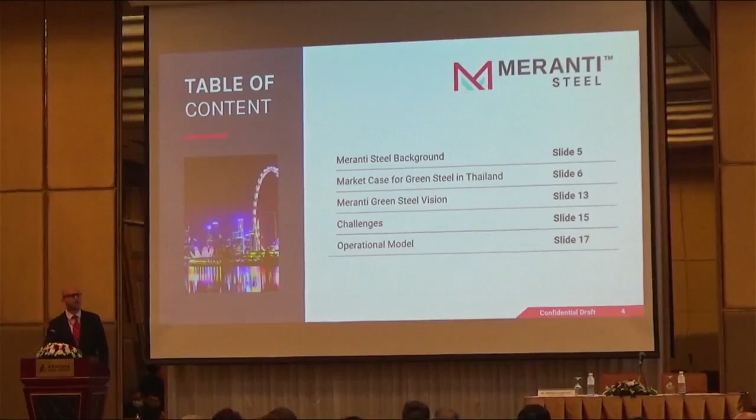A very brief background on Meranti Steel. The market case for steel in Thailand is green steel, and we've heard a lot of fantastic presentations on it, so I will keep that short. Then the Meranti green steel vision, challenges, and operation. The focus will be on the operational model, because at the end of the day, the question is how can we actually do something like green steel.

Very briefly on the background: this is our factory in Myanmar. Meranti Steel was incorporated in 2016, headquartered in Singapore. We have a joint venture with JFE Steel and Japanese trading companies for coated steel in Myanmar, in the Thilawa Economic Zone. It's fair to say it's one of the most modern manufacturing plants in Myanmar. Capacity in phase 1 is 180,000 tons, in phase 2, 360,000 tons. We started production on CPL in February 2020. This was our first project.

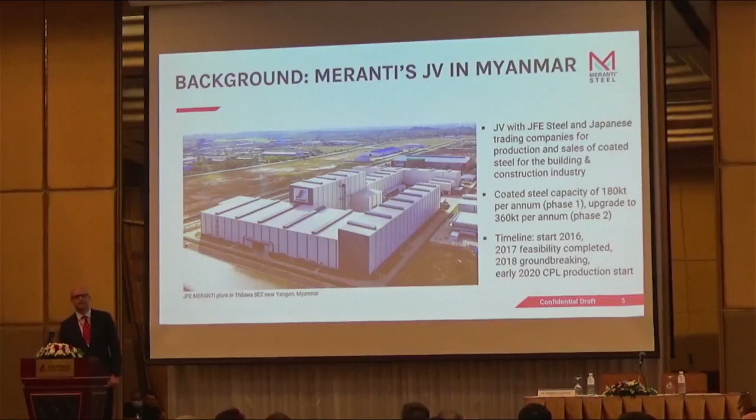Meranti Steel's second project is the green steel plant in Thailand. We looked at different countries before starting to dig deeper and go into planning - Indonesia, Thailand, Vietnam. We felt Thailand is the right place. Vietnam had a lot of investment into steel, so we see there a certain total capacity, and in the short term, there's a consolidation. Indonesia was also very interesting. We thought Thailand was actually a country where we saw a strong backbone in terms of downstream industry, a strong infrastructure for steel making, and of course existing steel companies and steel players.

We also saw - and I'll talk about this a bit later - the national grid, with more than 50 gigawatts in terms of electricity generation and consumption in Thailand. So these were factors that made us decide we will focus on Thailand.

If we look at the steel demand in ASEAN, steel consumption and steel production in ASEAN is expected to double by 2035, or more than double - very strong growth. We looked at the growth numbers before; all countries in Southeast Asia are growing above, and we see a very strong growth potential.

If we look at China, we already see a very strong reduction anticipated by 2035, going down from currently more than 900 million tons to around 650 million tons. We see a paradigm shift in China, from quantity to quality, as they call it. That's interesting because quality is most often more expensive. We believe that steel prices, driven by many factors, will go higher - one of them being China's move from quantity to quality. That is, in a way, an opportunity with higher steel prices to look at new investments.

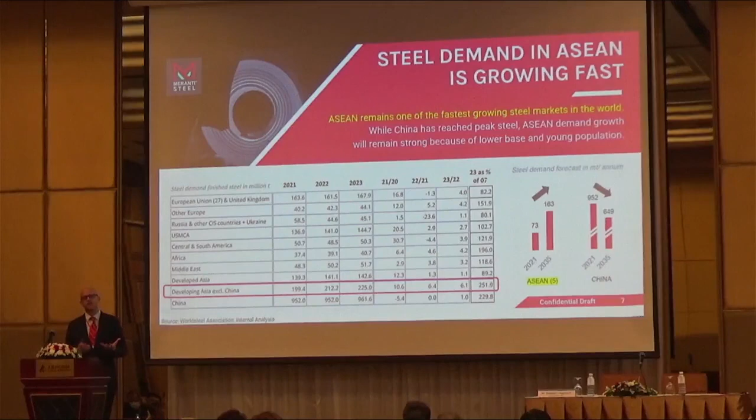And then we see other factors. Decarbonization costs a lot of money, as with CBAM, and we see what's happening in Europe. So we believe that steel prices will go up in the next 10 to 15 years.

If we look at another phenomenon - more than 7% of emissions in the world are from iron and steel, and that's a massive amount. People and consumers are only starting to realize that the iron and steel industry is the heaviest polluter among all industries. That's a challenge for the steel industry, but it's also an opportunity, because consumers start to develop a willingness to pay a little more attention to everything made of steel. So there's a premium potential arising, especially in automotive and home appliances, where customers are willing to pay more for decarbonized or green steel.

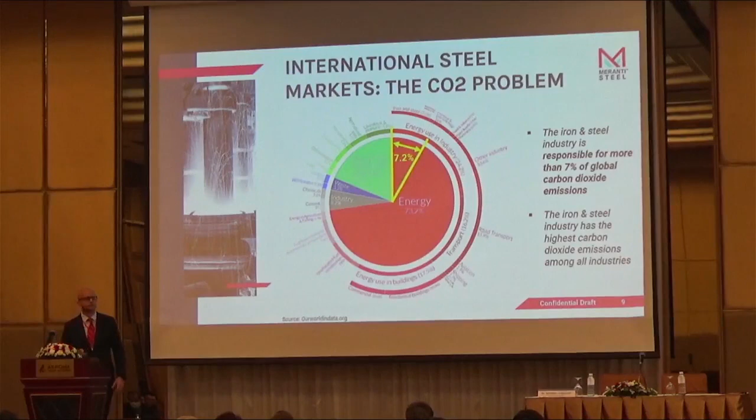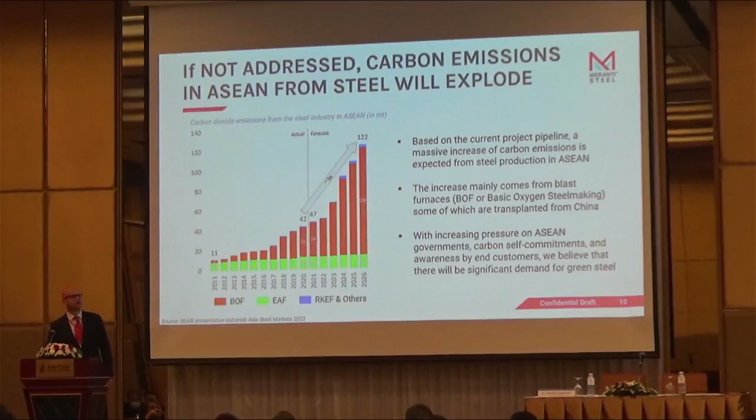If we don't address this - and this is a brilliant slide, with the permission of Vivian, I'll show it again - if we look at what's happening in Southeast Asia, there's a lot of new projects in the pipeline. But we believe there's an opportunity to do something else than carbon dioxide emissions in the form of blast furnace projects.

Because downstream, a lot of our customers, or steel customers, have set clear goals to reduce CO2 emissions over the next 10, 20, 30 years. If we look at the car industry, for example, there are some very ambitious targets - General Motors wants to be carbon neutral in Scope 3, meaning their supply chain, by 2030. I honestly don't really know where that green steel shall come from.

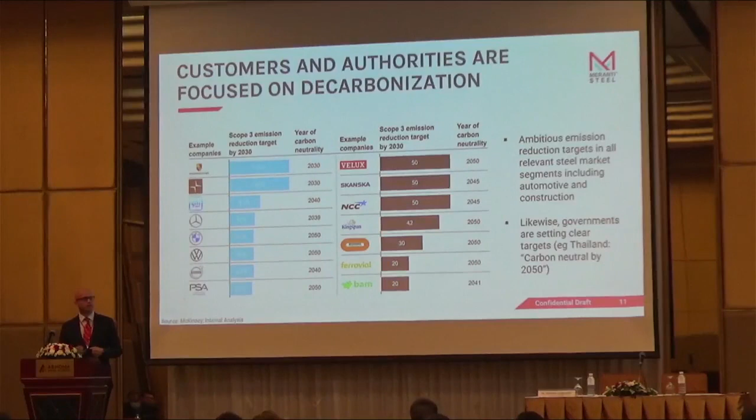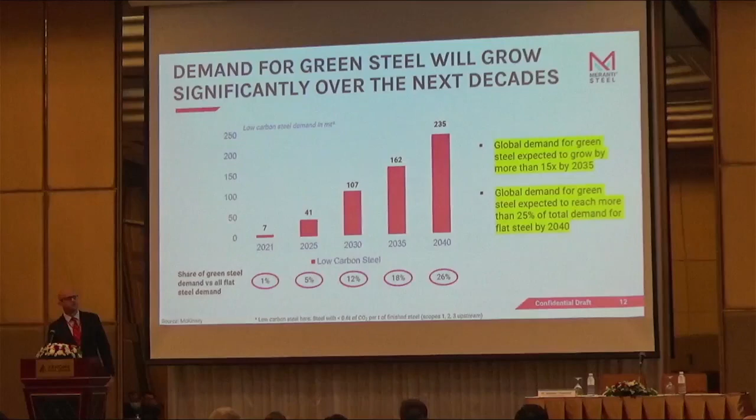These are ambitious targets, but it shows that big companies, also under pressure of regulators and authorities, bring us to the question: how will green steel demand evolve? It will be a huge opportunity from a business perspective, but also a huge necessity. It has to be sustainable, but also economically and commercially sustainable. Just going into green steel for ecological reasons will not make sense because the company will not survive.

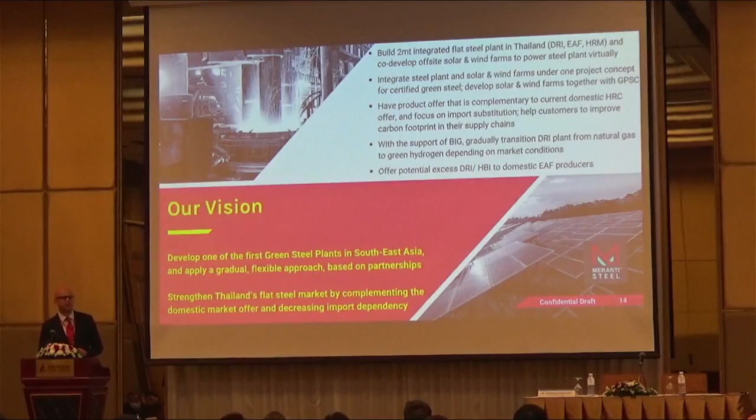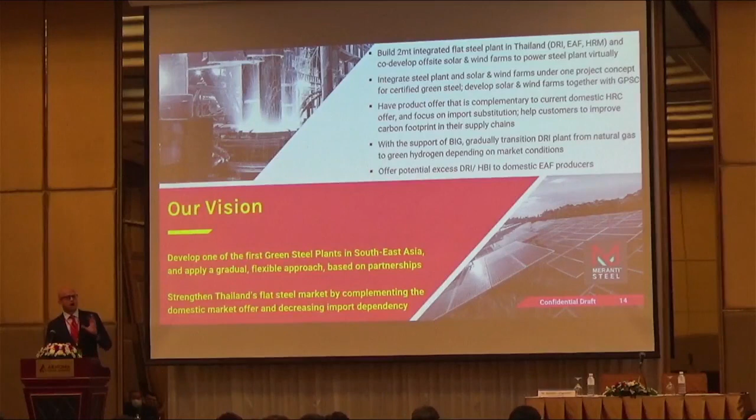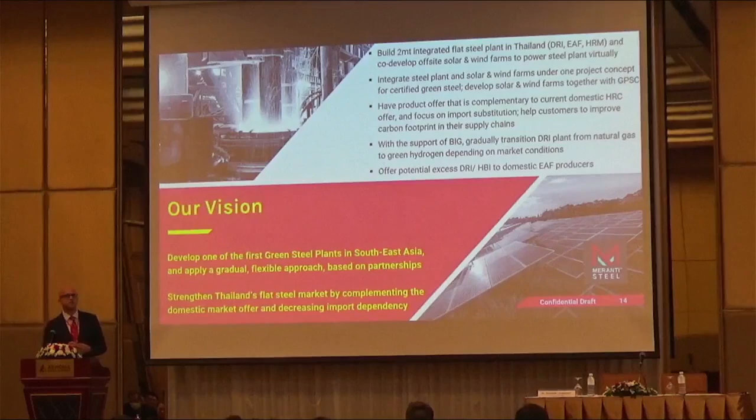We want to strengthen Thailand's flat steel market by complementing the domestic market offer and decreasing imports. So we are not trying to replace domestic offers, we are trying to substitute imports. Our product focus will be on import substitution. We are planning to build a 2 million ton integrated flat steel plant with power required to power the steel plant. It will not be direct, it will be third-party access, and I will talk about this in a minute.

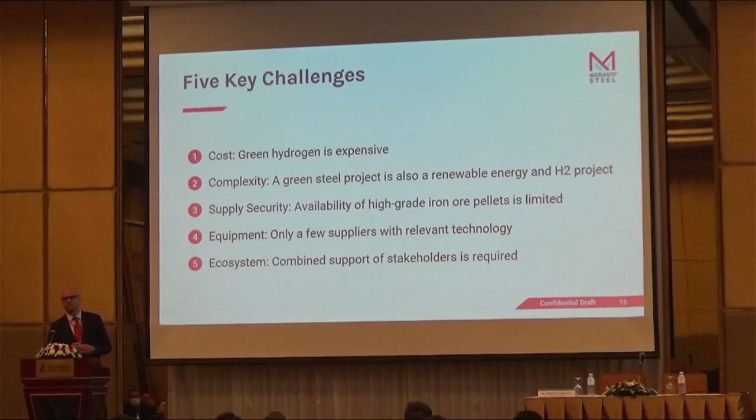The challenges: secondly, green steel projects are tremendously complex because they're not just steel projects, they're also energy projects. We need so much energy for green steel that we have actually several projects in one project. Thirdly, supply security - we mentioned this already. The availability of high-grade iron ore pellets is limited.

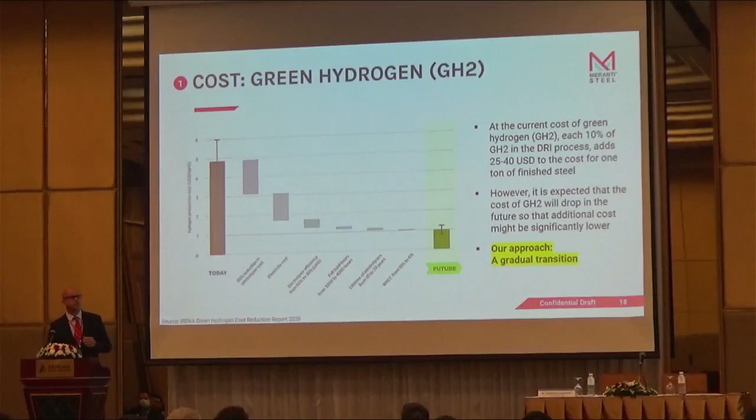$40 per ton more. So we need to take it one step at a time. Our approach is gradual transition. What you see here on the left is the CO2 emissions for blast furnace-based steelmaking, around 2,300 kilos of CO2 per ton of steel.

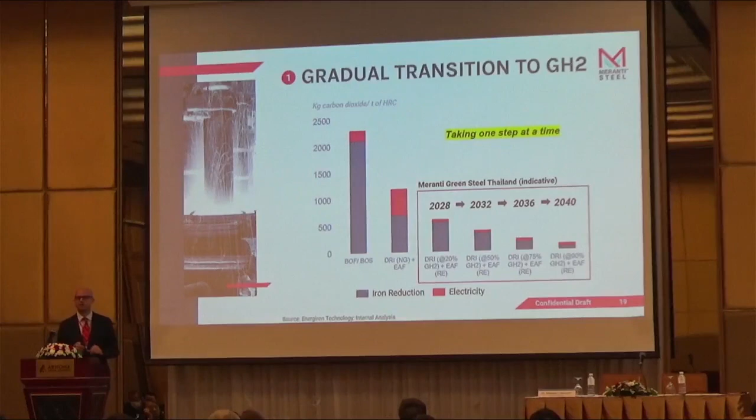So we want to take a gradual approach, firstly for cost reasons, but also because of technology reasons. As it was said, we don't know yet where exactly the technology will go, so we don't want to put all eggs into one basket. We want to take it step by step, and that's absolutely critical for us.

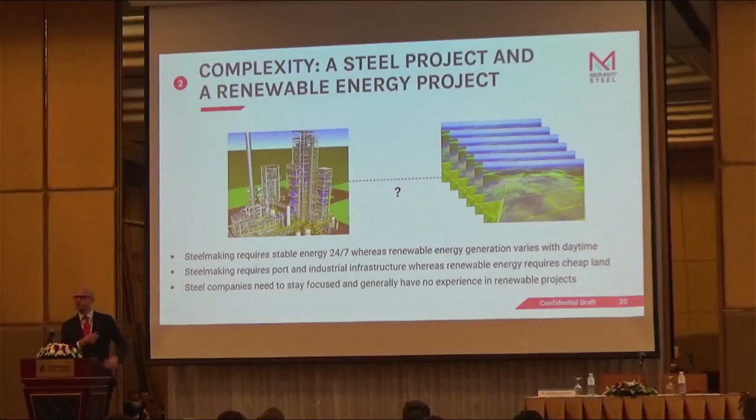Challenge 2, the complexity: a steel project and a renewable energy project. At Meranti, we are all from a steel background, we are not renewable experts. So we are dealing with the fact that steel projects and renewable projects have very different characteristics. In order to address that, what we want to do is have two separate projects: one is solar and renewables, one is a steel plant. They're in different locations - we have an off-site generation of renewables, and the renewable project will sell electricity into the grid, while the steel plant will buy electricity from the grid.

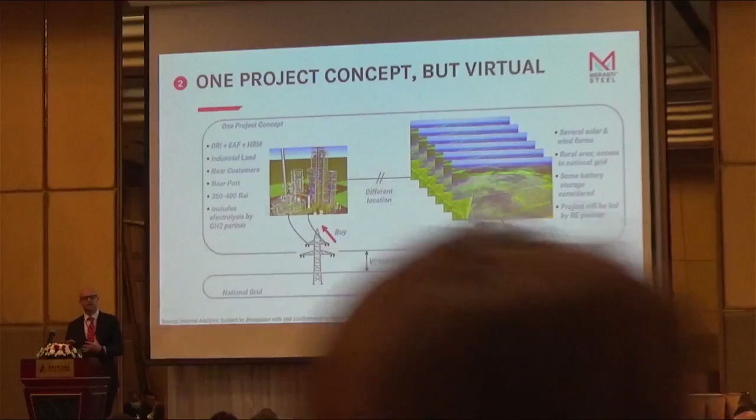What is critical, as we mentioned, is third-party access. We can only do this if we have third-party access, meaning we have an entity that is a renewable entity that produces electricity, sells into the grid, and the steel plant buys from the grid. If we have that, it's not only an environmentally sustainable project, it's also commercially sustainable, because the cost of renewable generation is so much lower than fossils. The levelized cost of energy from renewables is only 5 to 6 US dollar cents, so renewables are actually very cost competitive.

The challenge is to balance the grid. We cannot have a grid with only renewables, it needs to be a mix. And the challenge is we need to have the regulation in place to allow for third party access. But if we have third-party access, it's absolutely possible.

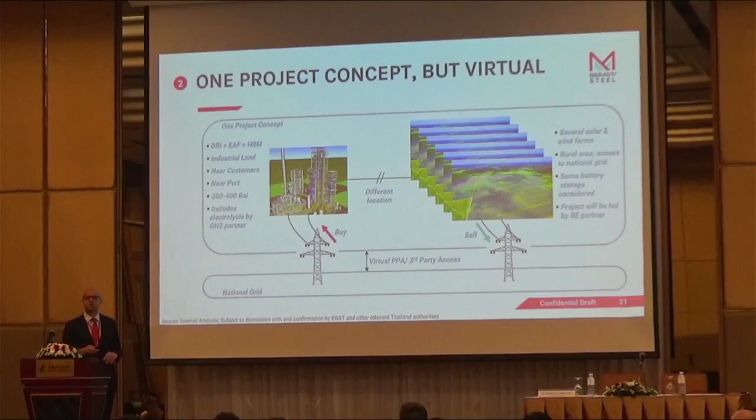In order to make that happen, and we can't do this alone, we have partnered with GPSC. Kumbichitra from GPSC is here today. I'm very happy about this partnership because GPSC is focusing on renewables, GPSC has the expertise in renewables, and GPSC is covering that side. Electrolysis, we can't do ourselves either, and we do this with Bangkok Industrial Gas. We are here with Kongsaka today, and I'm also very happy that they have joined us here. So BIG will cover everything that has to do with hydrogen production. Meranti will do steel, BIG will do green hydrogen, GPSC will do renewables. Only in this partnership setting do we believe it is possible to put in place a green steel project.

This is, without going into too much detail, a picture of how we are organizing this project. Renewable energy off-site, and it will not just be one solar farm, it will be several solar farms, and it will be operated and managed by GPSC.

Green hydrogen will be on-site, right next to the steel site, because the hydrogen cannot be too far away from the direct reduction. That will be operated by BIG. And then we have green steel right next to the electrolysis plant and the hydrogen project.

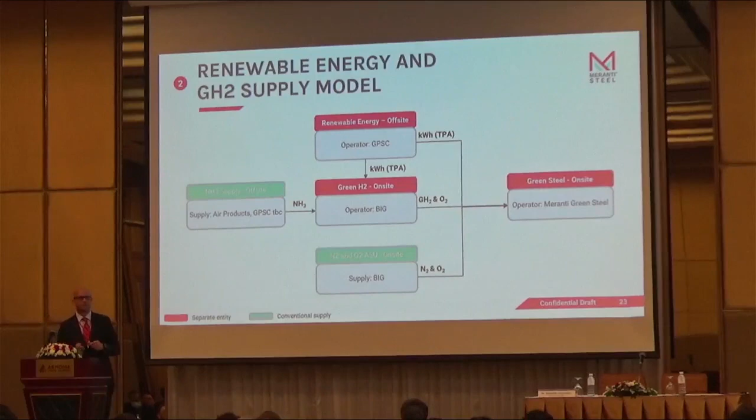Number 3, raw materials. The third one is supply security, and it was mentioned pellets are limited. We see a very strong push for decarbonization in steelmaking internationally. High-grade iron ore pellets are limited in supply. So we follow a 2+1 strategy for securing high-grade iron ore pellets: partner with 2 mining companies and 1 commodity trader, or with 2 commodity traders and 1 miner.

So far we have signed an MOU or partnership with 1 mining company. We're about to sign a partnership with a commodity trader in the next 2 weeks, and we will announce both partnerships in the next 4 weeks. We're currently in discussions to see who will be our third partner for commodities, and that's important. We're talking about long-term supply of iron ore pellets into the plant, 20 years, to make sure we have supply security.

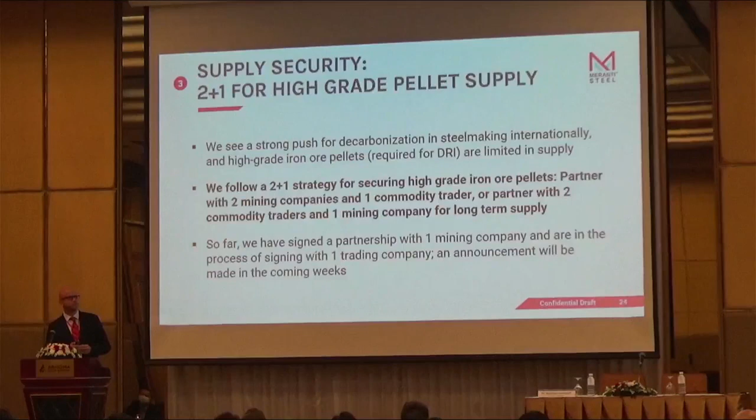Fourth, equipment. Equipment is limited, and equipment makers actually have a queue for direct reduction. So it was important for us to get into that process, into the queue. Very early, we decided to partner with Danieli. Danieli not only has a world-class technology, called Energiron, but also has a fantastic workshop in Thailand, in Rayong. So this is, for us, a fantastic partnership.

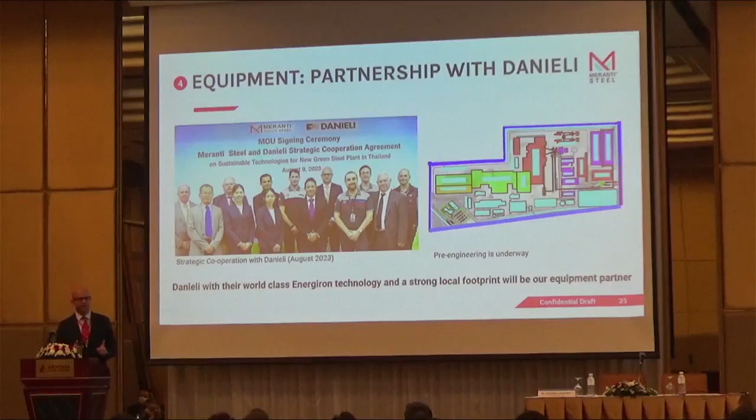So we're already working with Danieli on the pre-engineering. On the right side, you see the plant layout. We have a site, we have not yet announced it, we're in the process of formalizing it, but this is how the plant will look like. Right next to that site will be the electrolysis site that will be run by BIG. And then together we can actually do green steel, not fully green, but less than 600 kilos of CO2.

Fifth, that's of course the biggest challenge, I think, in bringing it all together: we need the ecosystem. We are engaging with a wide range of stakeholders. We are talking to the BOI group, with our BOI application. We're starting to talk with ONEP, EGAT.

We need to have an ecosystem approach that benefits Thailand, so we believe these efforts are worth it. Firstly, we can close the domestic supply and demand gap. We can open a path to sustainable steelmaking, and this could serve as a role model not just for steel, but also for other heavy industrial projects. We will create up to 1,500 direct jobs in the steel business, up to 10,000 jobs during construction, and 10,000 indirect jobs. There will be significant upskilling - there is no iron making at the moment in Thailand.

There's steel making, but there's no iron making, so there are opportunities for upskilling. We are also looking at digital solutions. I found it very interesting to see the presentation with the QR codes and the tracking system of carbon footprint per coil and per steel product. So we're thinking of something similar, where customers can actually see how much carbon dioxide is sitting in a coil. And then we're creating self-sufficiency and supporting Thailand's trade balance through import substitution and exports.

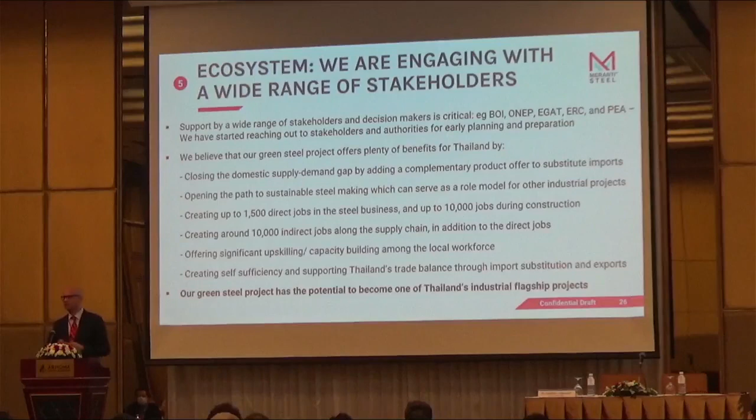I think if COVID has shown one thing - it has shown many things - but one thing is self-sufficiency is important. I think it's not good if we have too much dependency on imports. There will always be imports, but I think having self-sufficiency is a good thing. So our green steel project, we believe, has the potential to become one of Thailand's industrial flagship projects, and we're really inviting everyone to join forces - that's why this opportunity for us today is so meaningful.